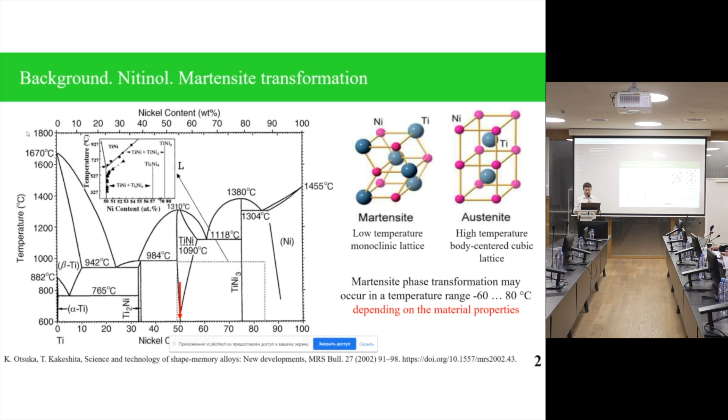So nitinol is an equiatomic intermetallic alloy in the nickel titanium system, and there are 2 thermodynamically stable phases, martensite and austenite, for low and high temperature respectively. This phase transformation occurs at relatively low temperatures, and with this transformation, shape memory effect can be explained.

On this slide, we have a diagram with stress, strain, temperature coordinates, and at the initial state, our material nitinol has a martensite structure with a microstructure presented by twins. Once we load our material, the deformation is accommodated by the detwinning process, so no plastic deformation. And once we unload our material, we still have some residual deformation as it is for conventional materials.

But once we increase the temperature above some critical point, namely austenite finish temperature, the transformation from martensite to austenite occurs. During this transformation, we have rearrangement of the lattice of atoms, and during this rearrangement, the macro shape also recovers.

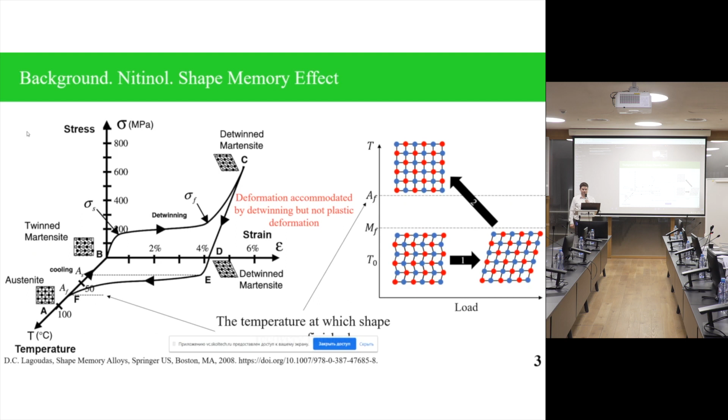So what happens if we try to load our material already above the austenite finish temperature? In this case, at the initial state, we have austenite phase, and during the loading, the deformation is accommodated by the transformation by so-called stress-induced martensite. In the end, we have detwinned martensite microstructure, and as we are already above the austenite finish temperature, after unloading of the sample, we immediately go back to austenite with subsequent macro shape recovery.

But also on this slide, we can see the fundamental dependence of the mechanical response of the shape memory alloy on the transformation temperature. So if we load our material at ambient temperature below martensite finish, we observe shape memory effect. If we load the material above austenite finish, we have superelasticity.

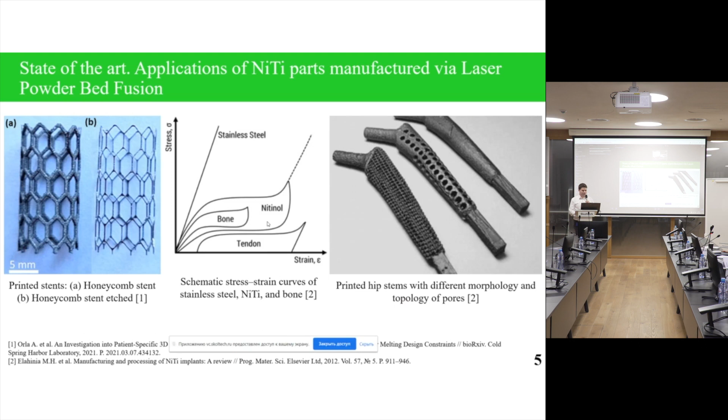But at the present state of the art, there is a problem of manufacturing nitinol components and devices with 3D printing with laser powder bed fusion. And this problem is related to the change of chemical composition after the laser powder bed fusion consolidation.

So in many papers, it was demonstrated that after 3D printing, the chemical composition, the nickel content, was reduced. And this circumstance in turn leads to a shift in the transformation temperature. There is a well-known dependence of the transformation temperature on the chemical composition, and this dependence was verified many times by many authors in different papers, so we can rely on it.

And this tells us that by changing the chemical composition of the alloy by 1%, we have a shift in transformation temperatures by 80 degrees, which is quite a lot for any application that I mentioned. For example, if we want to 3D print a stent for a coronary vessel, we need the transformation temperature just below the temperature of the human body by a degree C. So we want the exact transformation temperature. But for now, we can only measure it after manufacturing.

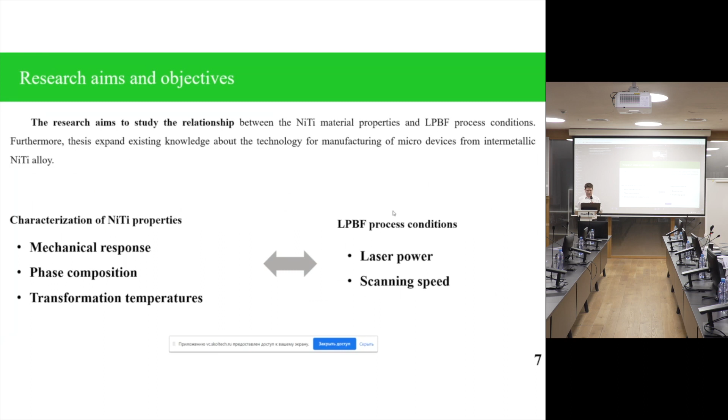So based on this, the main research aim is to study the relationship between the material properties of nitinol and laser powder bed fusion process conditions. For this task, different samples were manufactured with laser powder bed fusion, and then they were characterized by various techniques such as mechanical tests, phase composition analysis, and transformation temperature measurements.

In our additive manufacturing laboratory at Skoltech, we have a TRUMPF TruPrint 1000 installation that was used in the experimental study. This machine has the classical system based on 3 cylinders. One cylinder is for powder storage, another includes the substrate or building plate, and the third is for excess powder. The final part is received by repeating the same cycle: we deposit powder on the substrate, then the laser scans this layer and remelts it. Then the substrate goes down, and this process is repeated again and again.

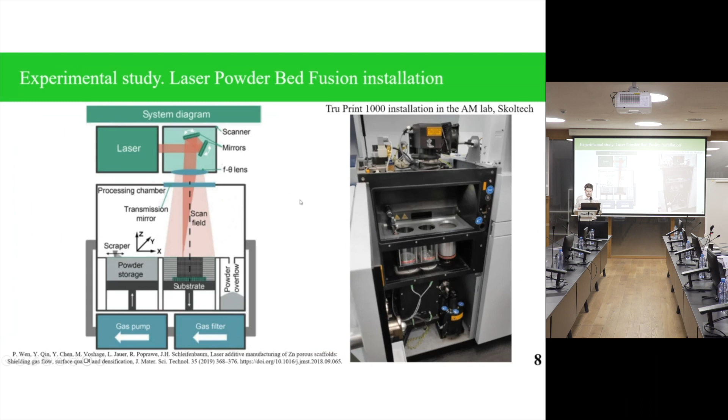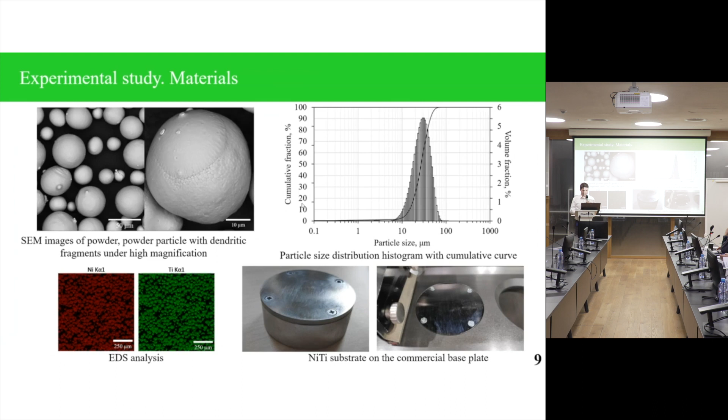In the experiments, a spherical prealloyed nitinol powder was used. Prealloyed means that each particle inside the powder is an alloy itself; the powder is not a mixture of nickel and titanium powders. To receive homogeneity in our samples and to provide reasonable metallurgical bonding between the substrate and samples, an in-house built nitinol substrate was manufactured. For the study, a relatively broad window of process parameters was utilized, shown here in scanning speed and laser power coordinates.

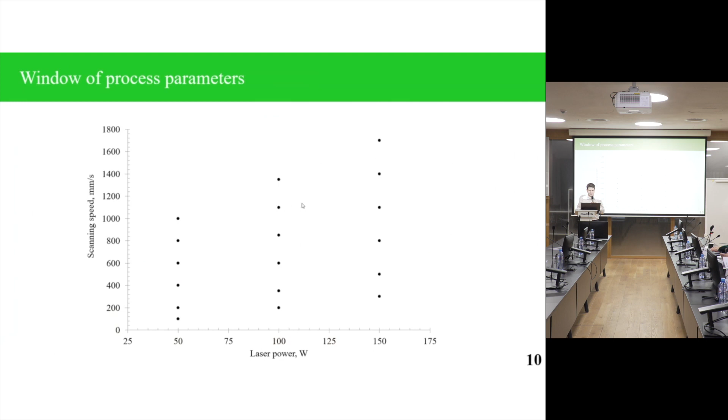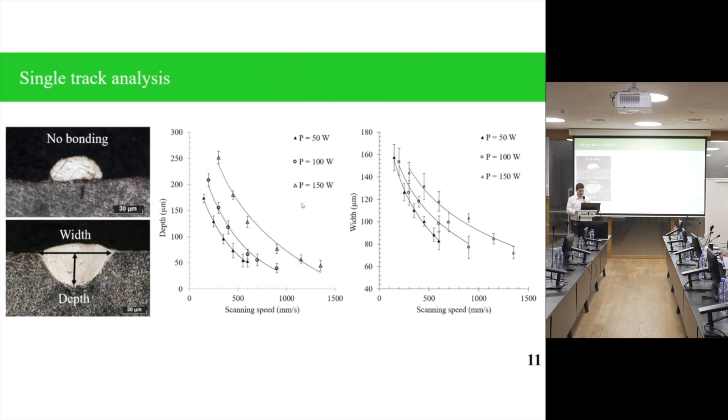The first step of the experimental study involved single track analysis. At this step, the substrate was lowered by 1 layer thickness, the powder was deposited, and then it was remelted with a single laser passage. During this analysis, some process parameters were already excluded as they do not provide enough remelting depth. For other cases, the melt pool dimensions were measured, namely width and depth. This data will be used further.

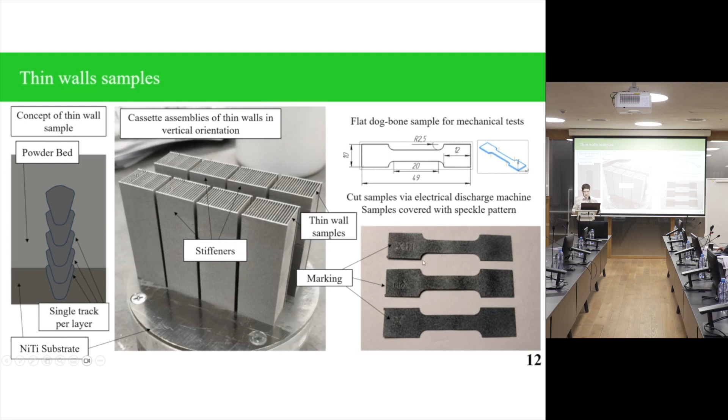For the second step, thin-walled samples were manufactured. I want to spare a couple words on the concept of thin-walled samples. The basic idea is to exclude the influence of the hatch spacing parameter, the influence of adjacent tracks. So for a single sample, we have only 1 laser passage per layer, as shown schematically here. All samples were placed between 2 stiffeners to exclude any possible distortion during 3D printing. After manufacturing, these samples were cut by electrical discharge machining to receive samples for mechanical tests.

Mechanical tests were performed within two schemes. First, tests were run until fracture, to evaluate the maximum strain we can achieve in most of the samples. The second test was a single cycle loading. That means we load all samples to the same strain to evaluate the recoverable strain.

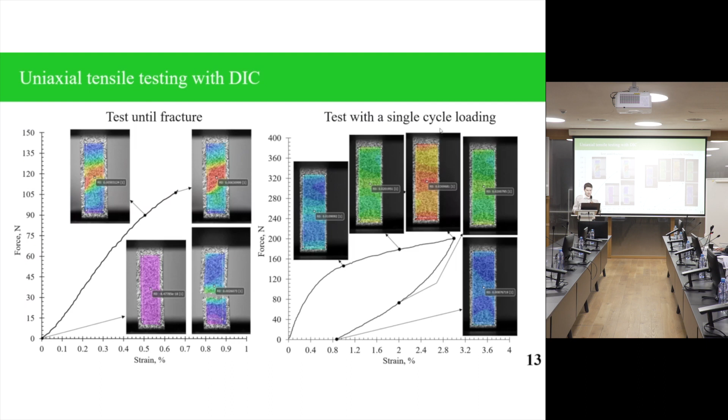After the first test, after fracture, the results show that we can subdivide all samples into two groups. The first group involved samples manufactured with low linear energy density input, which resulted in defects from lack of fusion. In this case, we had crack generation and propagation from void to void, and the overall fracture mechanism was brittle. Whereas enough energy density input resulted in a ductile fracture mechanism, where the fracture surface was represented by the cup and cone structure.

Results of the second test are shown on this slide. So here we can see that samples manufactured by different combinations of process parameters result in different irrecoverable strain in the as-built condition. And if we plot this result as dependence of irrecoverable strain from linear energy density, we observe the positive trend, and after some critical value, it came to the saturation point.

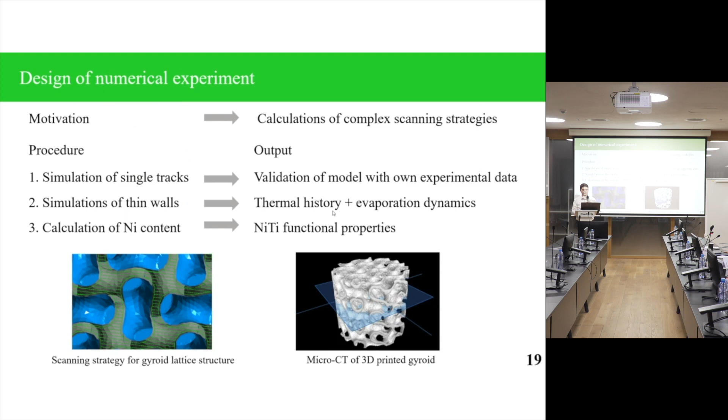So in this regard, the following simulation was performed, and the following procedures were done. So first of all, the simulation of single tracks was done to validate the model. Secondly, simulation of thin wall was performed to analyze the thermal history and evaporation dynamics. And finally, in thin wall, we calculated nickel content, or final chemical composition, that is coupled with resulting nitinol functional properties.

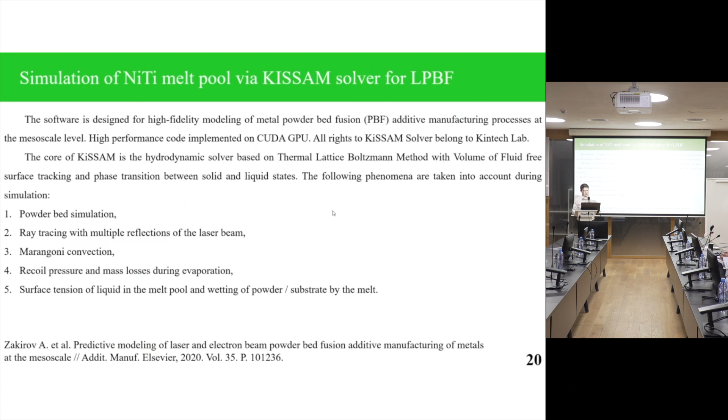All simulations in this work were performed in Kintech simulation software for additive manufacturing, or KiSSAM. So this solver was developed by Kintech Lab, and this is a fluid dynamic solver based on lattice Boltzmann method. And this solver actually involves many important phenomena that happen during laser powder bed fusion. So first of all, we have powder bed. The energy deposition is done through the multiple reflection between particles and substrate. Then we have in the liquid domain Marangoni convection. Because of the temperature gradient, we have recoil pressure that causes the deformation of liquid, and also we include surface tension for liquid and wetting of powder.

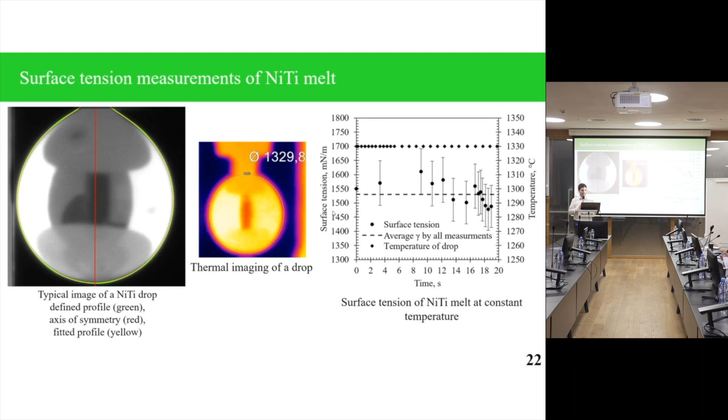Each simulation starts from thermophysical properties, and there is some lack of data of thermophysical properties for nitinol that are required for the melt pool simulations, and some data was received experimentally. The most important experiment was done to measure the surface tension of nitinol melt. So this is the method of pendant drop. Inside a graphite heater, the nitinol melt was formed, and from a graphite dropper, the drop was squeezed, and based on the measurements of the profile, the final value of surface tension was received, and it was used in the further simulation.

So the first step of simulation is powder bed generation, and based on the analysis of layer thickness for the stationary process of laser powder bed fusion, a 45 micron layer thickness was chosen for the further simulation, and the particle sizes for this powder bed match with real granulometric characteristics of real powder that was used in experimental approach.

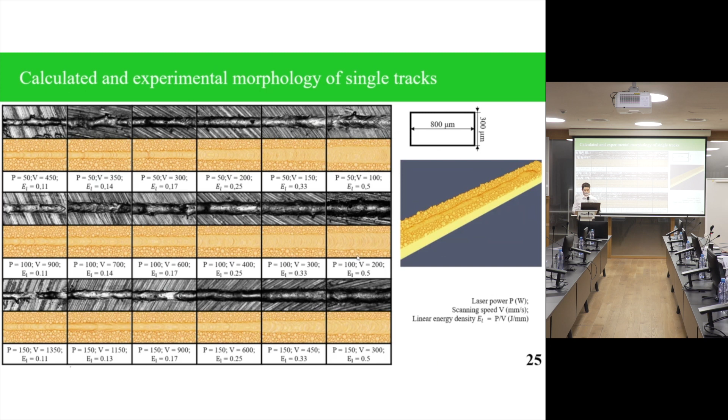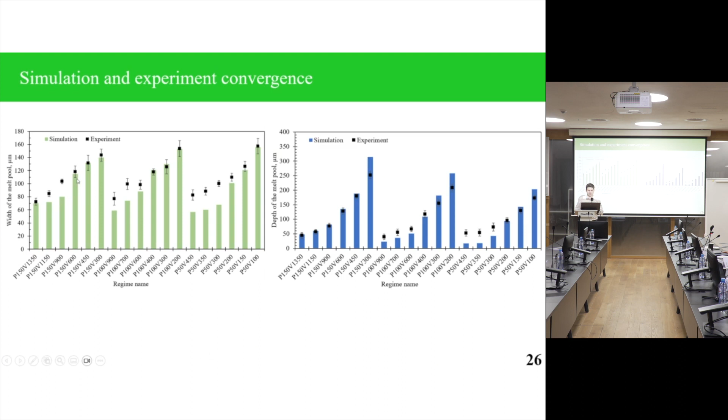with required accuracy. So the second numerical experiment involved the simulation of thin-walled samples, and the procedure looks like in the experimental study. So we make the powder bed on top of the substrate, we remelt it with laser, then on top of this geometry we add an additional layer of powder and remelt it with the previous geometry.

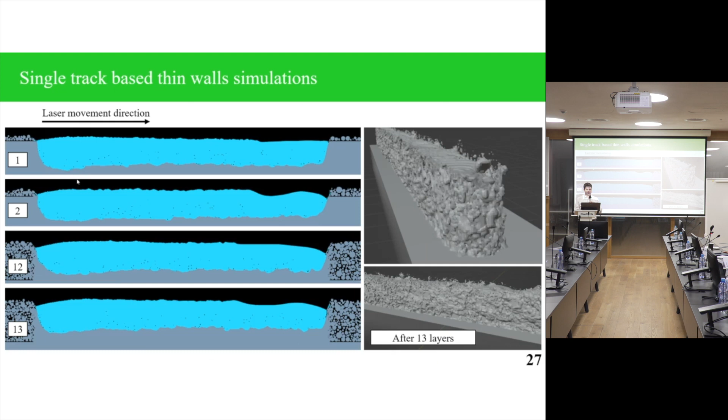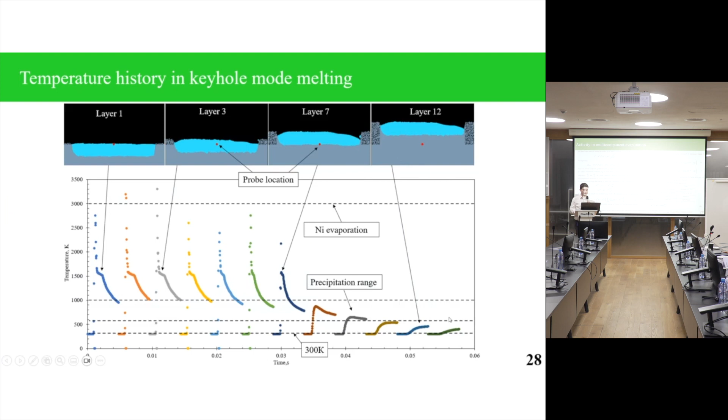So this numerical experiment was run until we do not have any significant temperature rise at the substrate level. So the probe location is shown with the red point, and in this point the temperature was measured for every layer, and we can see after 12 layers this temperature rise was insignificant. And these calculations actually were performed to analyze the difference in the evaporation kinetics for nickel and titanium components.

So we need to calculate the flux of vapor particles, and for this we need to know the activity coefficient of nickel and titanium. And this was done based on the thermodynamic approach, so we can calculate the activity coefficient from the partial Gibbs free energy. The partial Gibbs free energy was calculated from the total Gibbs free energy, which in turn is presented by the Redlich-Kister power series, which is known in literature for nitinol for various temperatures and compositions.

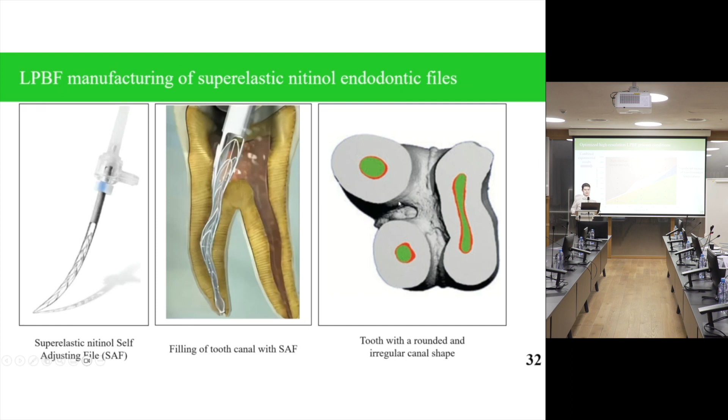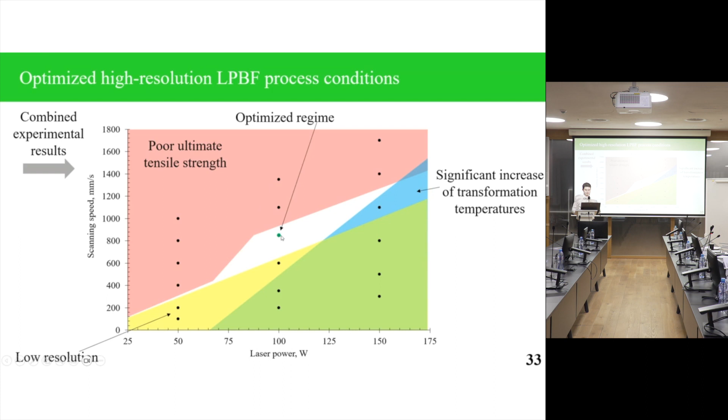And these samples were received. We demonstrated that we can achieve enough resolution to print such files. And now this project is at the stage of mechanical tests also involving some extracted teeth.

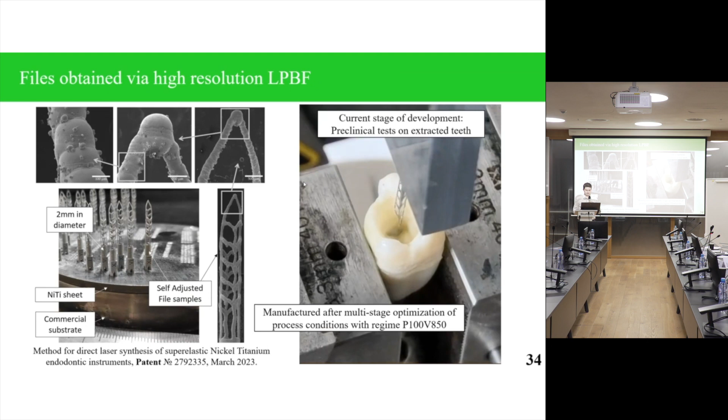All main conclusions of this research are presented on this slide. So critical relationship between nitinol properties and laser powder bed fusion conditions were obtained. Then 4D printing feasibility was implemented experimentally by introducing a multi-stage shape memory effect in a single sample without any additional heat treatment. Then self-adjusted files were manufactured by high-resolution laser powder bed fusion; enough resolution was achieved for this instrument.

Then some thermophysical properties were investigated with emphasis on the simulation of the melt pool. So surface tension value was received. And finally, by summarizing the experimental and simulation results, it was demonstrated that the main mechanism for tailoring of functional properties or shift in transformation temperatures is related to the different evaporation dynamics for nickel and titanium components.

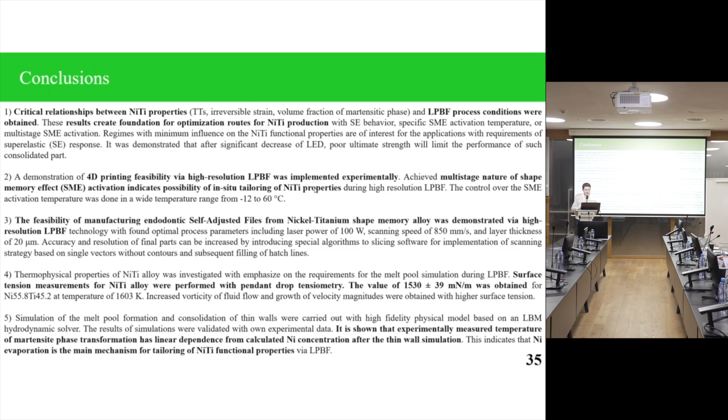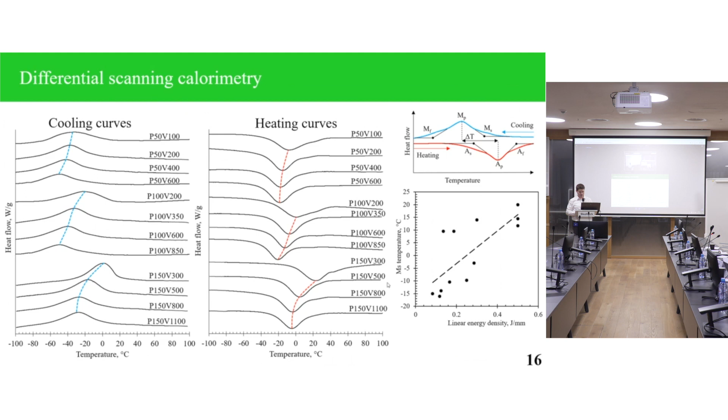Yeah, we can plot not the force against strain, but calculate stress against strain, and in the elastic region of the stress-strain curve, we can calculate the elastic modulus, and based on the phase that is in the material at this condition, we can have different elastic modulus. So if we have a mixture of phases, the elastic modulus can be in between the value for austenite and for martensite.

Right. Do you have any idea of what the modulus would be that you measured? Sorry, I didn't hear. Repeat. Do you have any idea of the physical values of the modulus that would result from your measurements?

Yes. So for austenite, the modulus is 40 GPa, and for martensite phase, as I remember, it's lower. It's about 10. So for different samples, I received slightly different results in between these values. But I didn't put emphasis on the elastic modulus in this study because I was mostly interested in irrecoverable strain after the single cycle deformation of these samples.

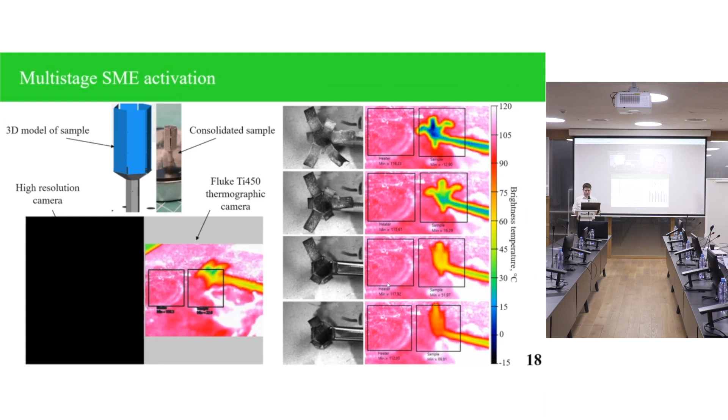But in my case, I have a strong texture for all my samples manufactured by different process conditions. And in this regard, also, I do not use wires, I use plates. So in this case, I didn't observe a strong size effect that can be definitely present for some micron wires. So thank you for your question.

The other question I have is shape memory alloys often exhibit the Mullins effect or Patrikeev-Mullins effect, where with consequent cycling, typically during the first cycle, the stress of the martensite transformation plateau is higher compared to the consequent tests. And in your data, you showed stress-strain curves or load-strain curves to failure. How many cycles did you try when you were doing the testing?

So yeah, you're right. If we take a superelastic nitinol sample and then test it in cyclic loading, we will have some hysteresis, some shift of this curve. But here in this research, this test was done in the framework of other projects. So I also see this effect for the samples manufactured by laser powder bed fusion.

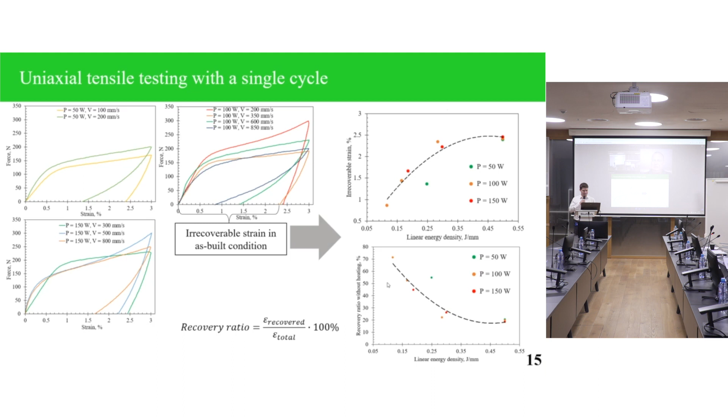Okay, thank you. My last comment, I guess, would be on the thesis and your slides. When we had a discussion at Skoltech in the summer, I pointed out that you use the abbreviation A.U. for arbitrary units for your X-ray diffraction, and also on slide 23, I believe. And typically A.U. stands for atomic units, so it's better arb.u. Yes.

Right. So that's my comment for the formatting of your thesis. It's not really a big deal, and it's understandable, but it's probably better if you correct it. Okay, thank you for your comments.

Okay, thank you very much. I have no other question. Okay, are you satisfied with the corrections that were made, or the response to your comments? Yes. Okay, thank you very much. We'll now go to Professor Ivan Sergeyev for his questions.

Thank you. So Stanislav, I have one principal question. You say that you study the functional properties of shape memory alloys, but at the same time you spent a huge amount of work on experimental study and comprehensive simulation work in terms of material science.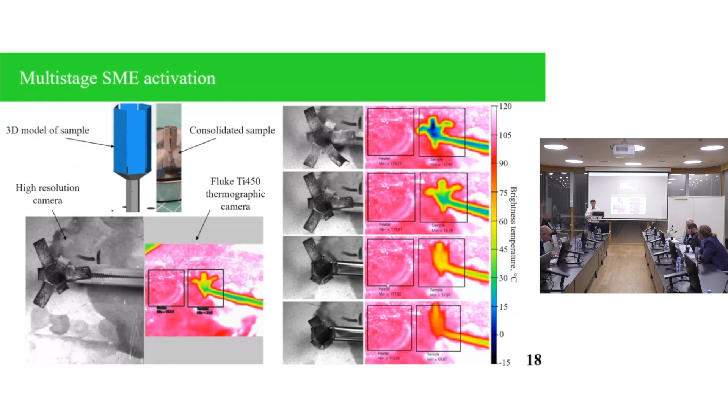And for the files, we actually need to have not shape memory effect, but superelasticity. So when this file goes inside the canal, it deforms. It adapts itself to the geometry of the canal, and once you eject it, the geometry of the file will be recovered because of superelasticity. So no heating as it is for the shape memory effect. So I hope I answered your question.

So the functionality of the NiTi files manufactured by LPBF will be further analyzed in the further work. So thank you. Thank you. No question. Are you satisfied with the changes? Yes, satisfied. Okay. Thank you.

Thank you very much. Professor Evlashin, your turn. Yes, thank you for the interesting talk. So I have a few questions. One question: for me, it's not clear how grain size and orientation of grains influence the mechanical properties of printed materials, because mainly you study only one orientation, vertically oriented samples. But it's also interesting to study what will be if you change the grain size and print the sample in another direction. And this is the first question.

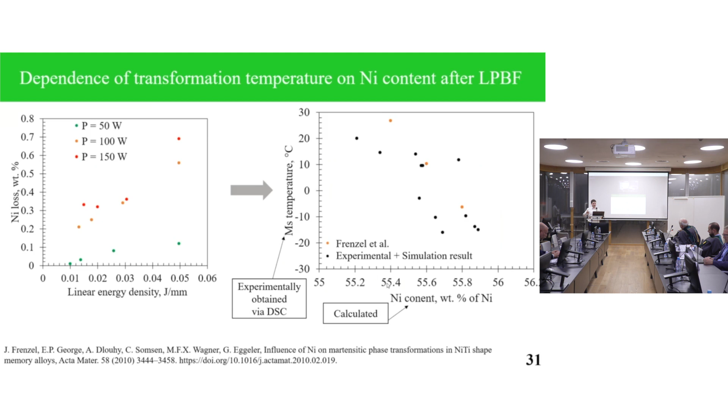But if we're speaking about some optimal conditions, in this optimal window, the change of nickel will be lower. So I would say that it is possible, but not in a wide range as was demonstrated in this scientific research. For real application, this difference will be lower.

Okay, thank you very much. I'm satisfied also with the changes. Now we'll go to the audience. Professor Korsunsky, Professor Salomon, if you have any questions or comments, you're welcome.

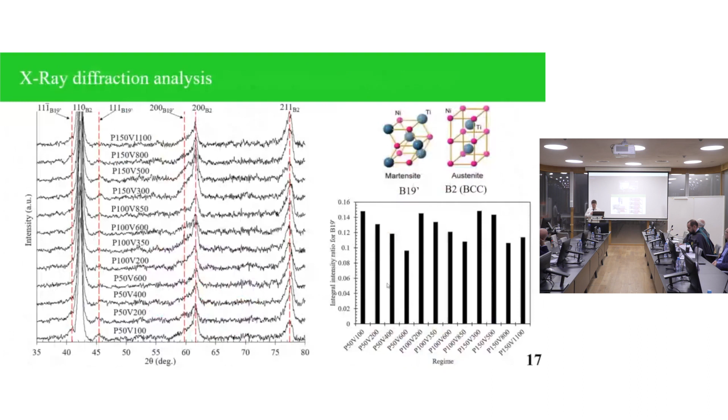Thank you very much, and thank you for presenting an extensive and thorough study. I couldn't quite decide for myself whether it was mostly a material science study or a technology optimization study or a modeling study. Let me explain what I mean. On slide 40, you say microstructure. Not 14, 40. You studied in MISIS, didn't you?

Yeah, correct. So if you said to somebody that that's your picture of the microstructure, they'd say, "Are you joking? I can't quite see. You didn't etch it to see the grains. You didn't do EBSD to see the grain orientation contrast." So it's an illustration of something. Some things are in contrast, some things are without contrast.

In fact, as you may have seen from some reference work and recent work, another aspect that affects the shape memory effect and the superelastic effect is the microstructure, the texture. So without taking that into account, your claim to control the temperature by manufacturing cannot be complete. If you say, I run this and I know that by composition I can vary it, that's fine. But if there are other parameters which also affect the performance, then you can't ignore them.

Then another thing that I couldn't quite understand, there is a lot of activity going across the board, people trying to learn to model predictively the process of additive manufacturing.

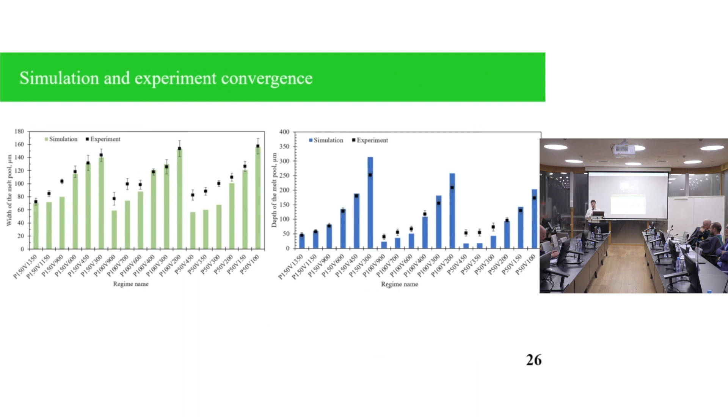So I'm impressed by the simulation. I partially agree with the criticism by Professor Korsunsky, but I do agree that the simulation is a strong part of your thesis. On the other hand, you claim that you used some simulation data, or at least outputs, for optimization of your self-adjusting files. Yes. Is it correct? No. No, you didn't use. No. Okay, you're speaking about the very last part that I added. Yeah, exactly. No, it's not about the optimization. Sorry, I should make it clear before you continue. This diagram was built on top of only experimental results. Okay.

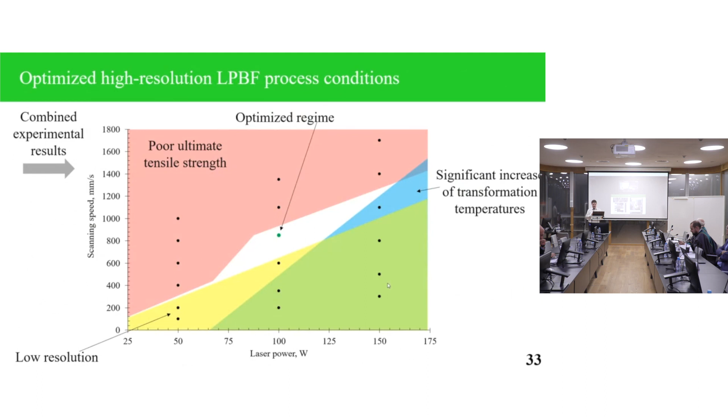Nevertheless, there is a part 5.4, simulation of layer-wise consolidation, and you go back to. Yeah, this simulation was performed just at the end of the work. If we can make such a multi-layer simulation, which is actually not often performed in literature, we can even try to take the data file from our machine, where we have all the vectors for laser movement, and take this information to our software. So the laser beam, the heat source during the simulation, moved as in the experimental setup.

And we just tried to perform this simulation of many layers. And this was not for optimization techniques. This is for some future works where we can evaluate some local features of such structures by simulation. But in the framework of this research, it was not performed. So optimization was done based on only experimental findings. I'm not pushing on optimization.

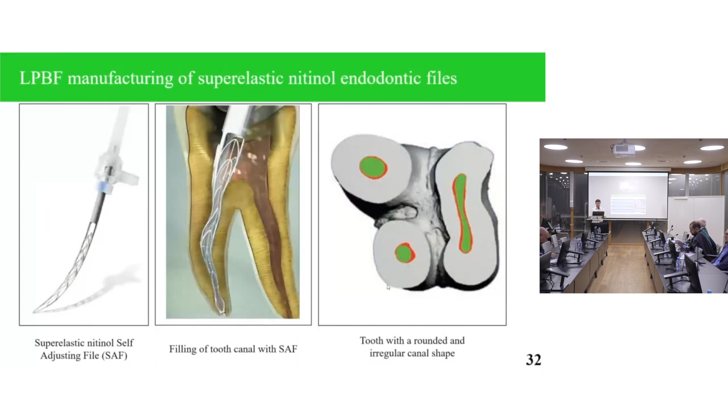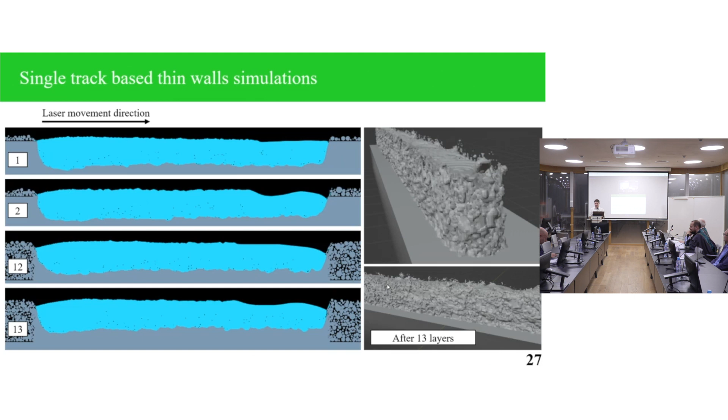As in the case of multi-layer simulation of thin-walled samples, the procedure was completely the same. And actually, the single-track experiment was also performed on the powder layer. So we had powder and then substrate. So for thin-walled simulation, we have powder, then we remelt it, form another layer, and the same procedure was done for the SAF. But the SAF is not a thin-wall structure. This is a tubular structure. Tubular. Do you agree? Okay. Hollow. Okay, and what does it change? Well, this is my question. Does it change something for you?

No, because actually the heat sink at the micro level, at the scale of the melt pool, as it is in the thin-walled type, and as it is in this type that you claim, is just the same, because the heat sink happens only from the melt pool to the previous layer. So this situation actually is quite close, the thin-walled one and this one. Close, yes. The question is how close is it?

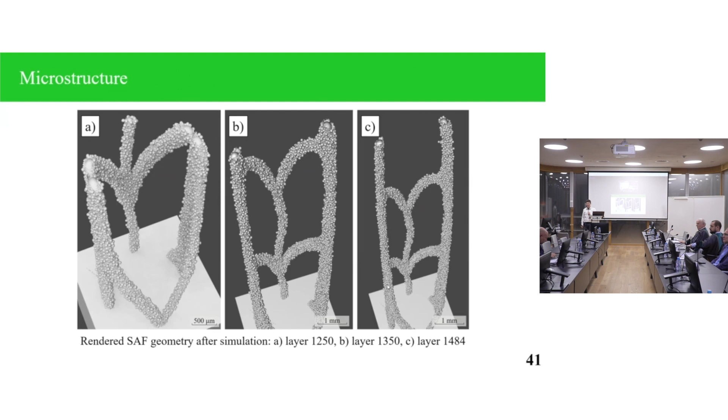Anyway, thank you very much. Okay, I'm satisfied. Okay, thank you very much. Any other question from the audience or online? No? I will give a last chance for questions to the jury members, online or in room. Do you have any other comments or questions? No? I'm sorry, I had a question. I typed in the chat, but maybe you haven't seen it. No, we haven't seen it. May I ask a question? Yes, please go ahead.

So thank you very much for your impressive talk. I have also a question about the simulation. You claim that you have a bunch of effects to take into account, like powder spreading, evaporation, fluid dynamics, and so on. And we know that it's quite a complex task to simulate. So how much time do you need to simulate a single track or thin wall, and even this multi-layer? Maybe it makes things more clear, because we don't know. Maybe it is weeks or months to simulate. So please clarify this. Thank you.